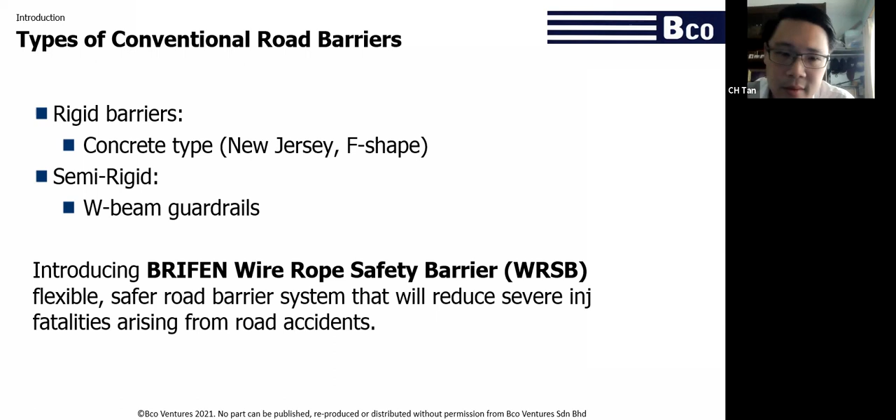A little bit of background to the BRIFEN system: it was originally developed in the UK by British Ropes many years ago. It was introduced to Malaysia in the 90s, and since then BCO has taken over the development of BRIFEN for the Malaysian market. BCO also owns the trademark and industrial design for the system in Malaysia, and BRIFEN is now a 100% made in Malaysia product.

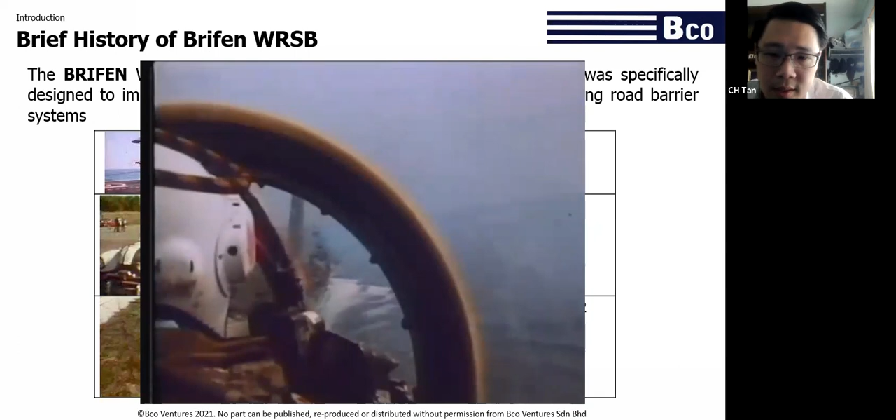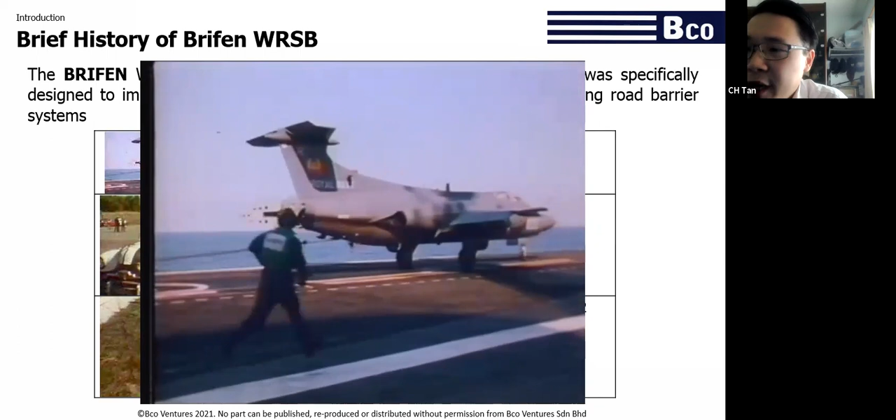So this is a short video of a fighter jet landing on the aircraft carrier. Now, this was originally the inspiration for the BRIFEN wire rope safety barrier system. As the plane lands, it is restrained by a wire rope going across the deck. So that was the inspiration. The idea being that if a wire rope can restrain a landing fighter jet, it can also restrain vehicles on the road.

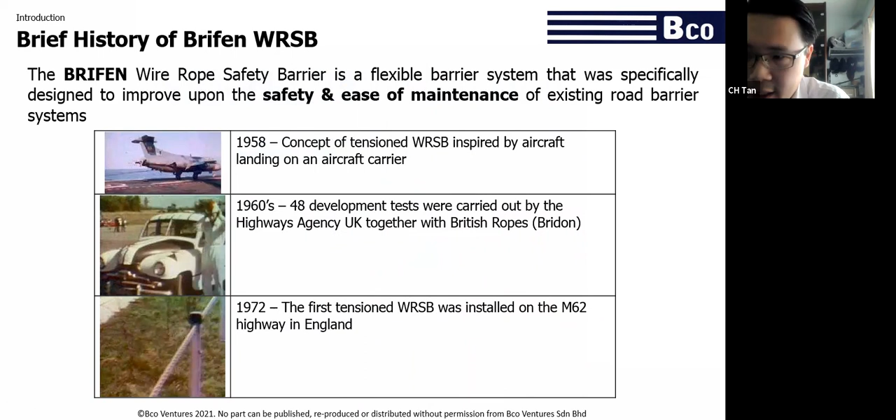So this is just a brief history of the system. The system has been developed for many decades. It started in the 60s in the UK, and the first version of the system was installed in the UK in 1972. Throughout the years, there have been a lot of testing done to comply to various standards over in Europe, in America, in Australia, to verify that the system is effective.

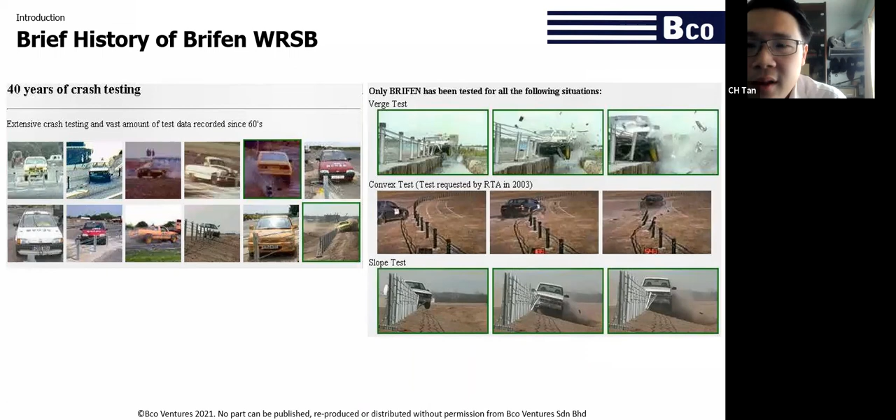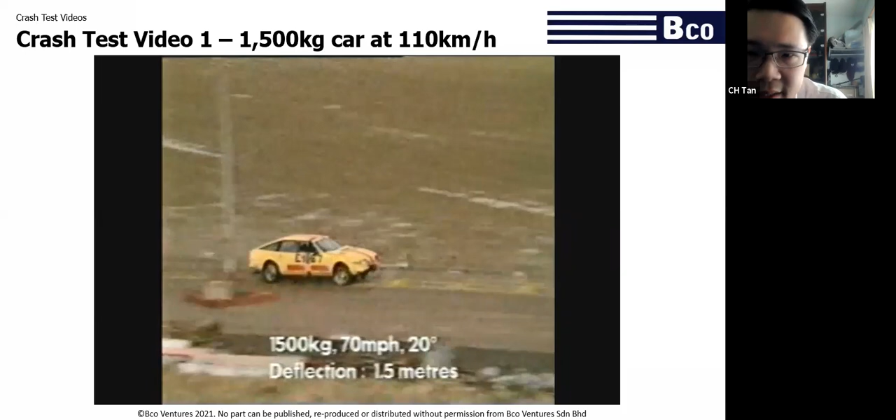So these are some of the videos of the testing that have been done on the BRIFEN system. This is a 1.5-ton car at 70 miles an hour, or 110 kilometers an hour. As you can see, when the vehicle hits the barrier, it is redirected onto the road. It does not cross over.

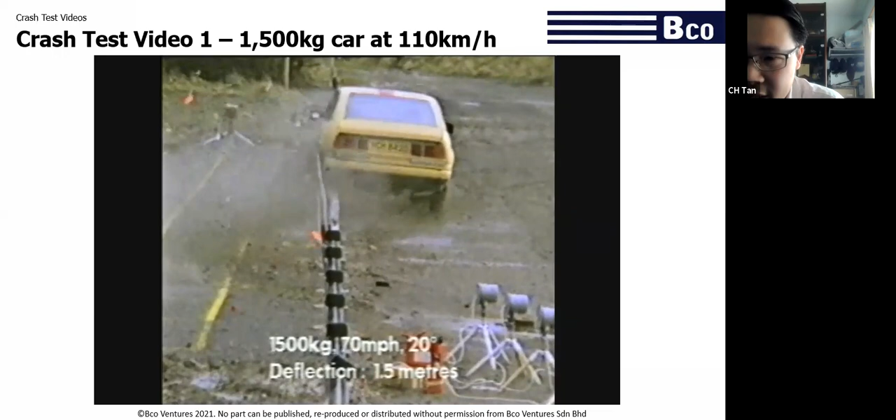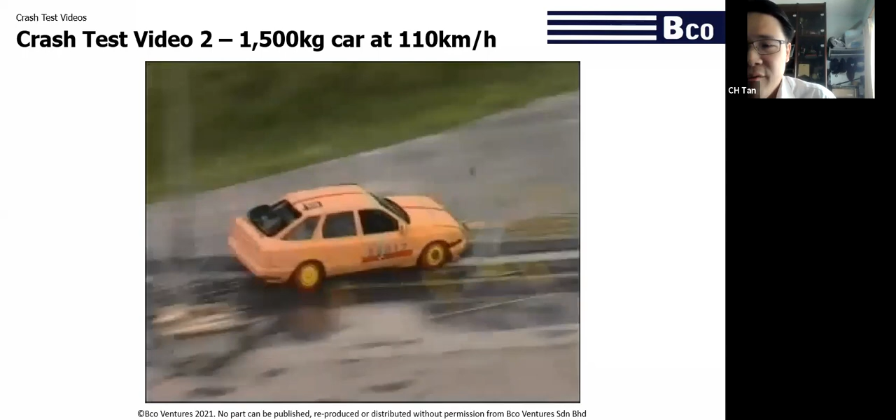This is another video, same weight of car, 110 kilometers an hour, a slightly longer video. Basically, as a flexible system, the system will deflect and absorb the energy of the vehicle. This reduces the damage to the vehicle and also the injuries to the occupants.

If the barrier is more rigid, the energy will be absorbed by the vehicle rather than the barrier, and the vehicle will have more damage and potentially more injuries to the occupants. So the purpose of the barrier, apart from absorbing the energy, is to safely redirect the vehicle on the road. We do not want the vehicle to cross over, because on the other side of the barrier there could be opposing lanes of traffic, which may cause a head-on accident, which would be very bad. Or there could also be structures behind, like a bridge or a signboard, that might cause further damage or injury to the vehicle and the occupants.

So this is a test at 110 kilometers an hour of the small car, 900 kilogram car. Again, the system deflects, absorbing the energy. Now, the idea of testing a small car and a large car is to ensure that any barrier you use covers the majority of the vehicles on the road in a particular country. So this goes from the small car up to the reasonably large car, which would cover most of the vehicles we have on the road in Malaysia.

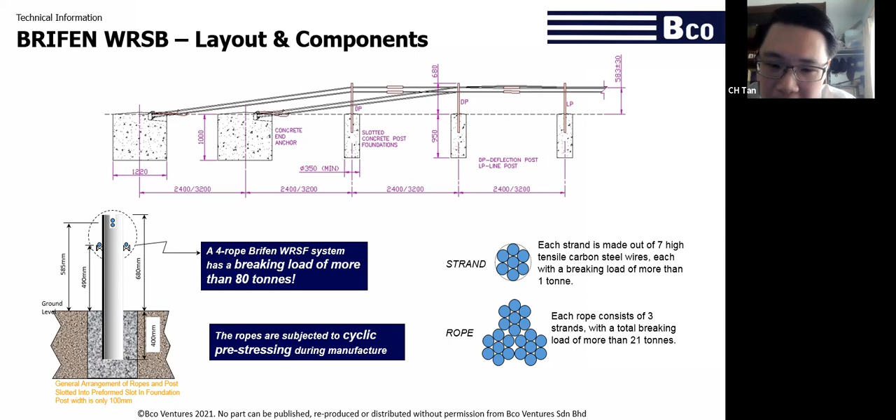And this breaking load is a direct tensile test where you clamp the rope in the machine and pull. So in the event of an accident where a car is dragging along the wire rope, the direct tensile load on the wire rope would be less. So actually to date, from our experience, we have never actually encountered the rope actually breaking due to an accident.

This is the shape of the BRIFEN post. It's referred to as an S or a Z section. They are just mirror images. If you look at it from the side, it roughly looks like an S or a Z.

Why the shape is like this rather than using a round shape is because when it is shaped like this, the vehicle will impact it in this way, and they will all fall in one fixed direction. If it were a round post, some posts might be poking out onto the road, and they may endanger other motorists or motorcyclists that come by after the accident. The idea of the mirror image is to ensure that the round edge is presented to a vehicle, so when the vehicle hits it, it does not get stuck or snagged on a sharp edge.

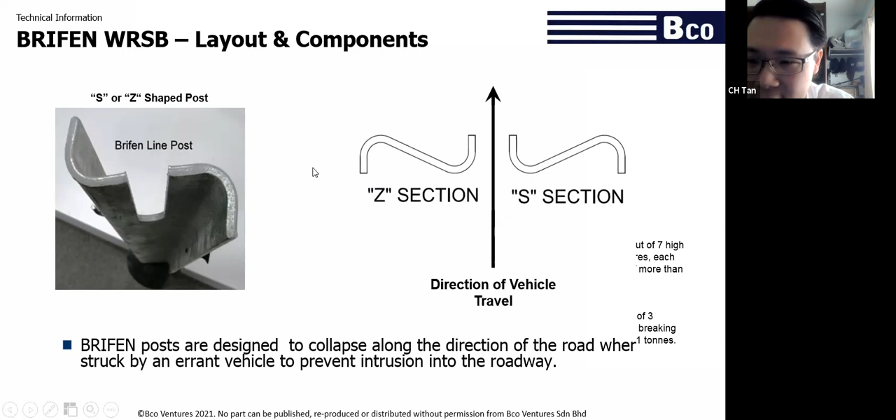This is the wire ropes. We have wire rope joints along the fence to provide tension and also to enable it to be opened up if necessary for whatever reason. We have a left-hand thread and a right-hand thread, which is used to tighten or loosen the wire ropes.

For longer fences, we will have an intermediate anchor. The purpose of this is to ensure that the barrier continues throughout the length, however long it needs to, rather than needing to stop and start the barrier again, creating a gap. By using the intermediate anchor, the system will be continuous. It's only used in barriers longer than 1.2 kilometers for one single fence.

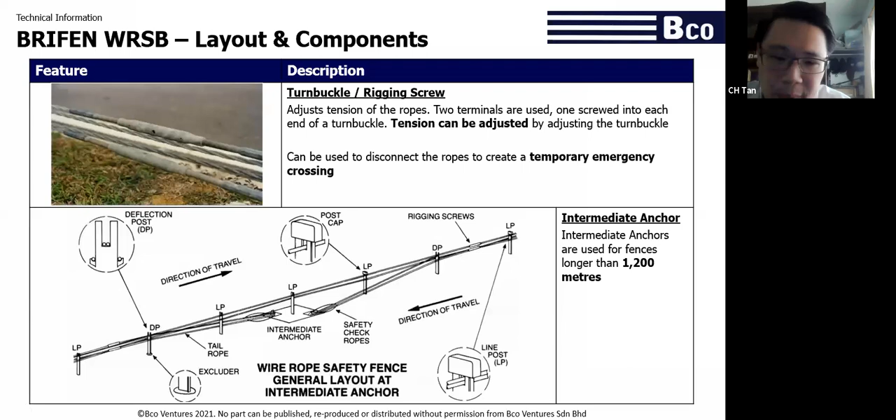The anchors, this is the ground anchor, as I mentioned earlier. There will be a concrete block underneath here, 1.2 cubic meters. In this case, the client has covered it with grass.

Another option we have is a vertical anchor. This is only used in very limited conditions, usually at places like toll plazas where the barrier needs to butt up against the toll plaza building itself or the guardrail at the end of it.

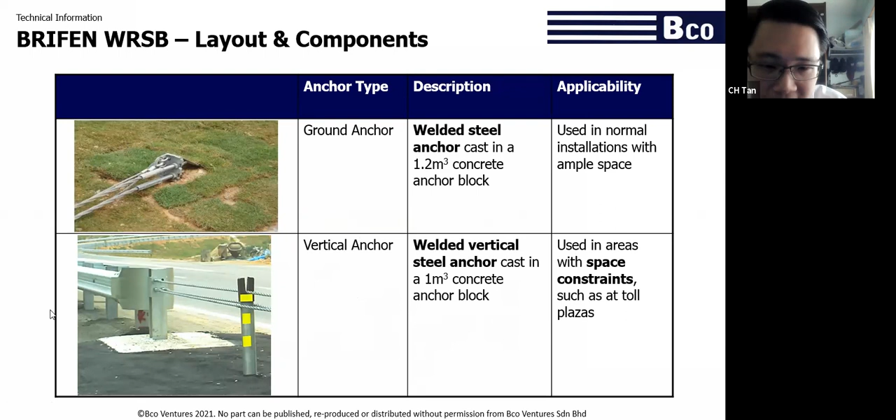Accident repair. Now, one very important concern with regards to road barriers is the maintenance and repair. We refer to it as repair because in terms of maintenance, there isn't actually any maintenance required, as in you do not have to go in and do any servicing to the system. If there's no accident, you can leave it there, it's fine. At most, maybe once every one or two years, just do a tension check for the wire rope, and that's all.

So in an accident, like we saw during the crash test video, usually around 4 to 10 posts will be damaged, but all other components are usually undamaged, which means that the wire ropes can be reused.

One of our oldest installations is actually around KLIA. This was installed when the airport was built in the 90s. The wire ropes there are still the same wire ropes from day one until now. We have just been replacing posts when necessary, when there have been accidents.

So as the posts are slotted in, they are easily removed and replaced. This saves time, and there's no heavy machinery required to pull the post out or to break the concrete or anything like that. Also, since it does not need machinery, it requires low manpower, reducing repair costs.

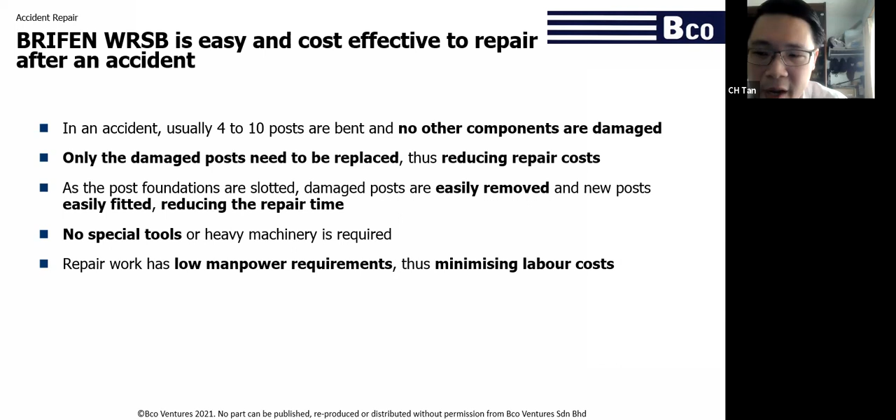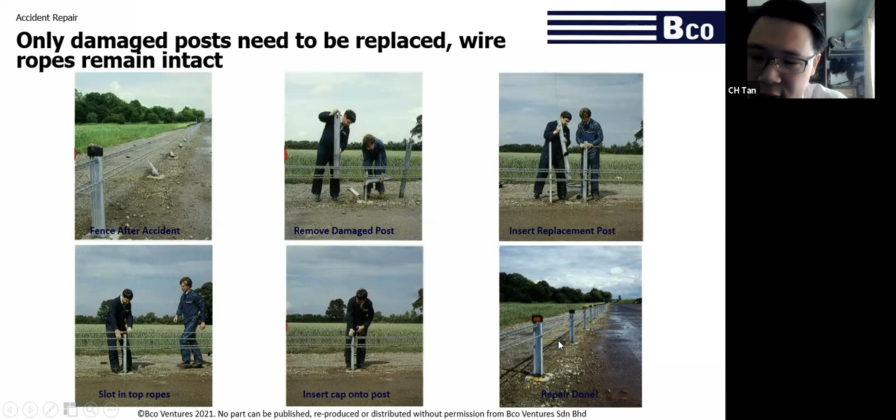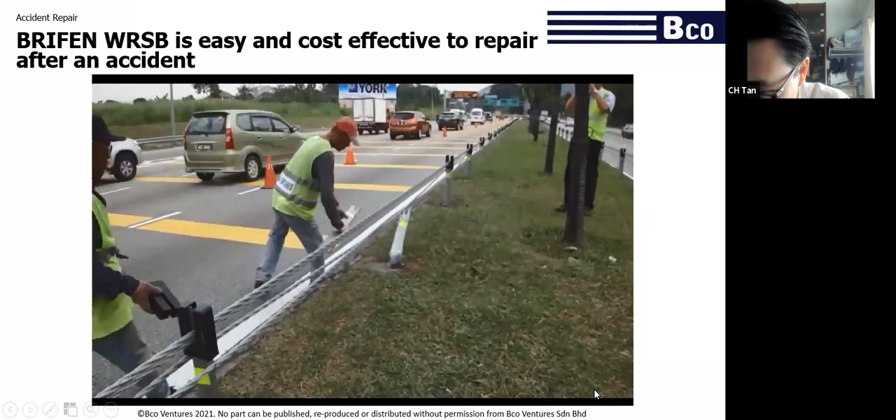This is a demonstration we did for JKR. It's from 2010, a long time ago, but the system repair process is still the same.

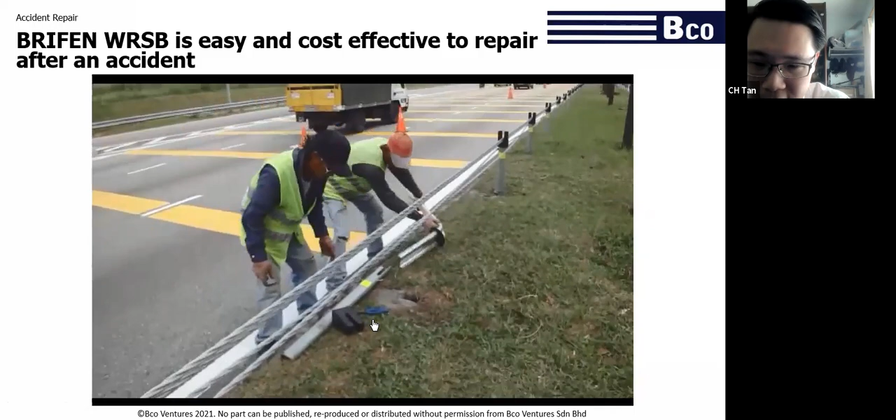You can see the post being pulled out. This is a concrete footing with a slot. He's now putting in the dust cover. The rope is parted.

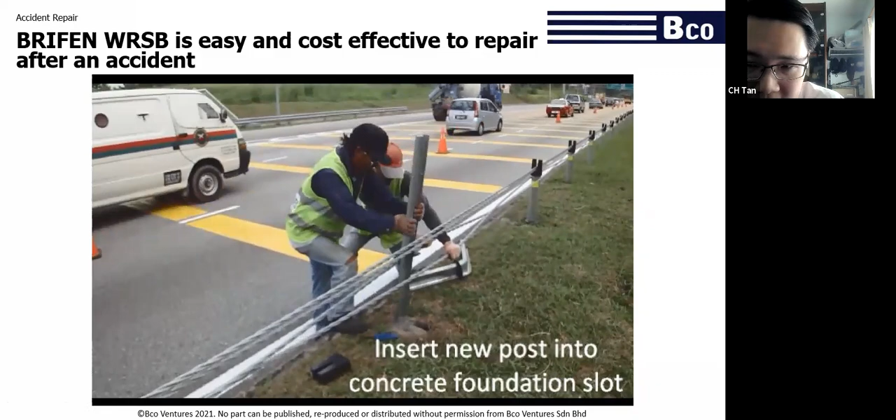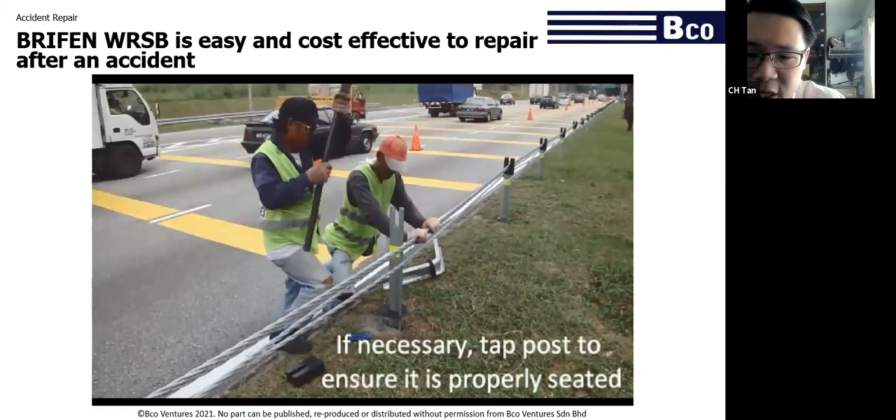The post is put into the slot. Now he's just tapping it to ensure that the post reaches the bottom of the slot, so we know that the level is correct.

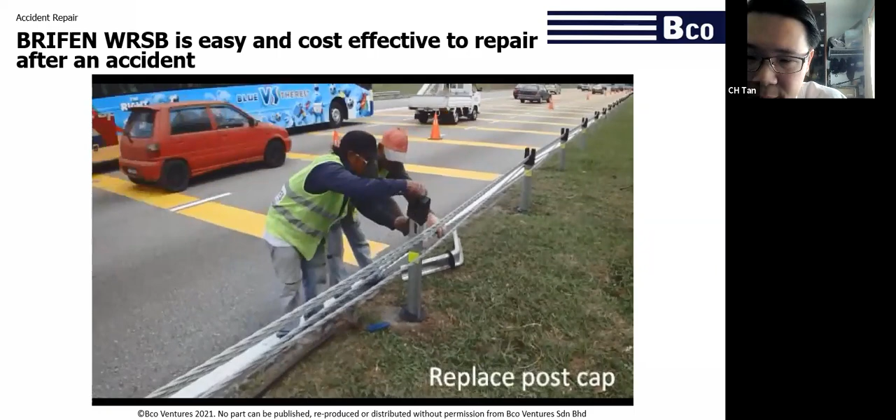Putting on the cap. Repositioning the ropes.

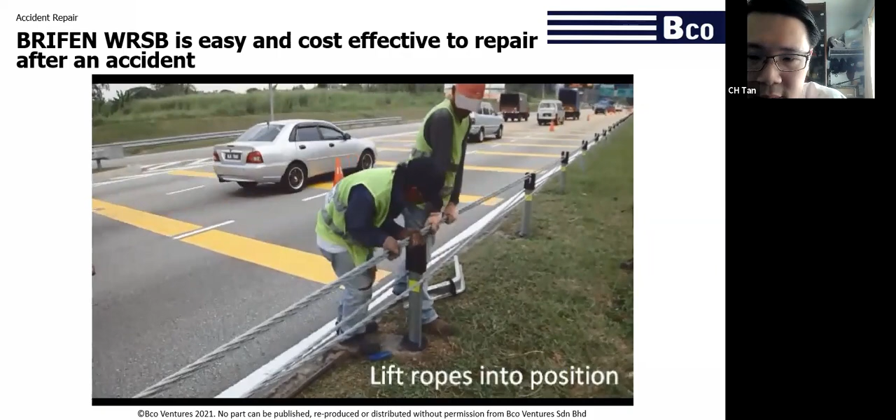And that's completed. So this took around a minute and a half. So if there were 10 posts, it would take about 10-15 minutes to actually do the repair.

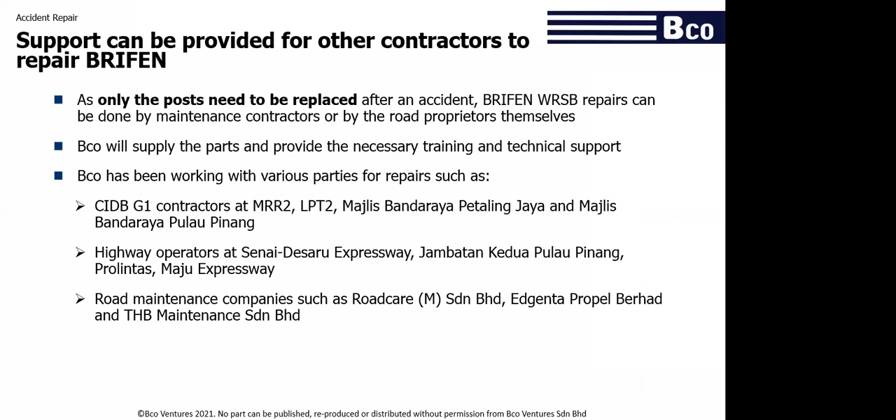Tan, sorry to interrupt. Do you have a headphone set you can use? There are still complaints about the audio being soft. I don't have one, I'll speak louder. Okay, sorry about that. If you don't have it, just proceed. Alright, I'll speak louder and closer to the laptop.

Sorry, the repair takes about 1.5 minutes per post, so if there were 10 posts damaged, it takes about 10-15 minutes from experience. Sometimes it actually takes us longer to set up the traffic management cones and signboard than to actually do the repair.

Now, as this repair is not very complicated, some of the repairs have been done by either the road proprietors, such as the concession companies themselves, or by their own maintenance contractors. BCO supplies the parts and will provide any training needed or technical support. If they have a problem, they can call us and we can advise them accordingly. So we have worked with various parties like the G1 contractors for MRR2, East Coast Expressway, and various town councils, as well as highway operators themselves, and road maintenance companies such as Roadcare, Edgenta Propel, and THB Maintenance.

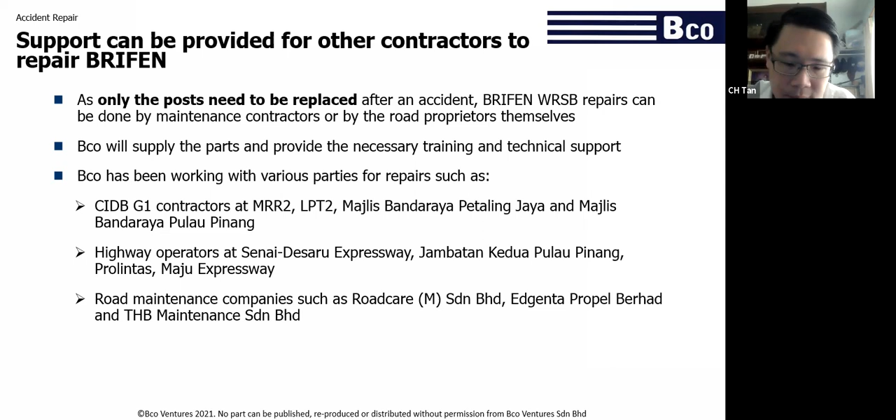This is a life cycle cost comparison. Basically, apart from being safer, BRIFEN is also a more cost-effective system than other barriers that are being used. So this calculation assumes a 1 kilometer installation. So we can look at the approximate installation cost.

So guardrail installation would be about 160 ringgit per meter, so it will cost 160,000. BRIFEN will be slightly less, around 140 ringgit per meter, so 140,000. But a concrete barrier has quite high upfront cost, usually around 350 ringgit per meter upwards.

So in an accident, if 8 meters of guardrail is damaged, it will cost approximately 3,000 ringgit to repair. This price was actually given to us by a guardrail repair contractor. For BRIFEN, if 5 posts are damaged, 16 meters of barrier, it's about 240 ringgit per post, about 1,200. So with the assumption of 5 accidents per year over 10 years, the cost would be 312,000 for guardrails and 200,000 for the wire rope.

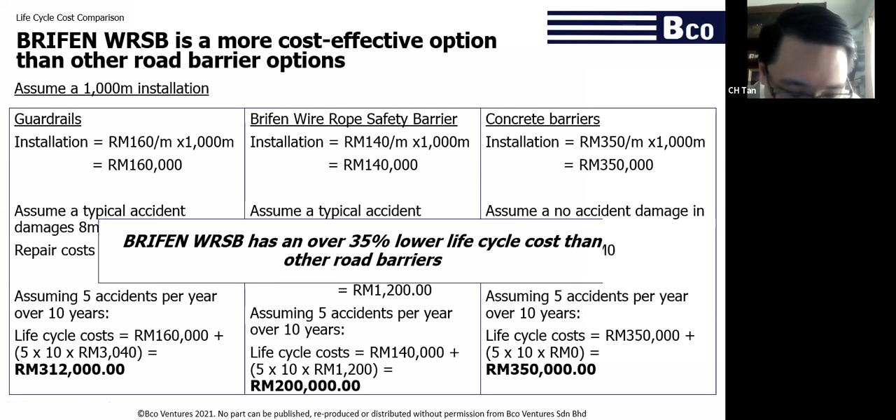Now, concrete barrier is generally accepted to have no repair cost because when hit by normal vehicles, it is usually not damaged. So it's just the upfront cost, but as you can see, it is still quite significantly higher than the wire rope system. So the salient point here is that BRIFEN has over 30-35% lower life cycle cost than other road barriers.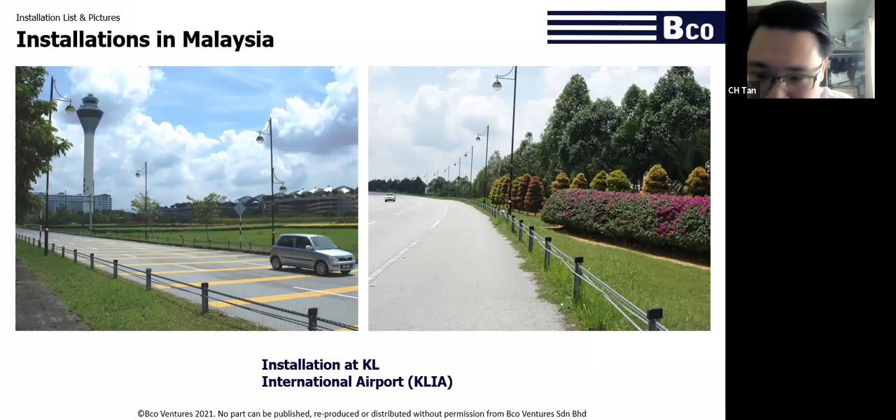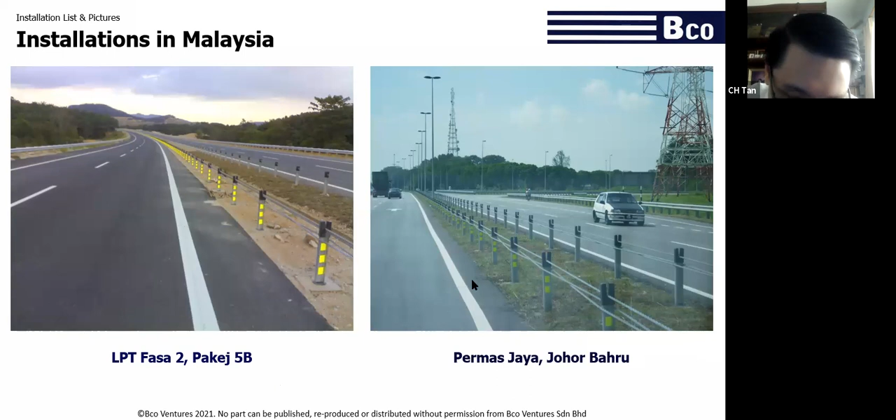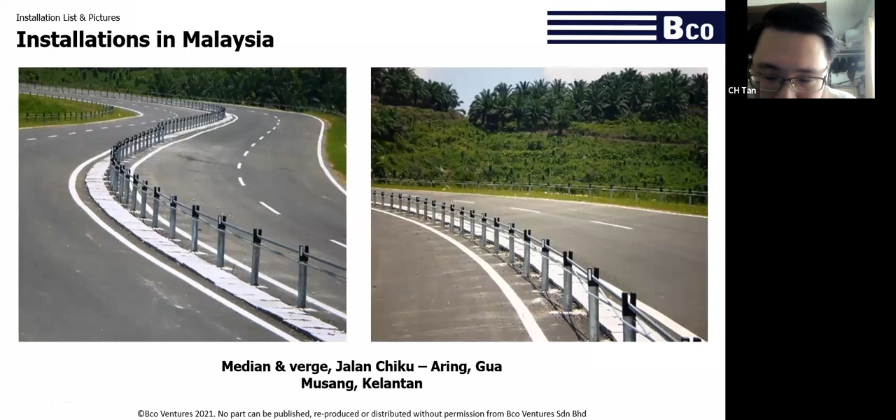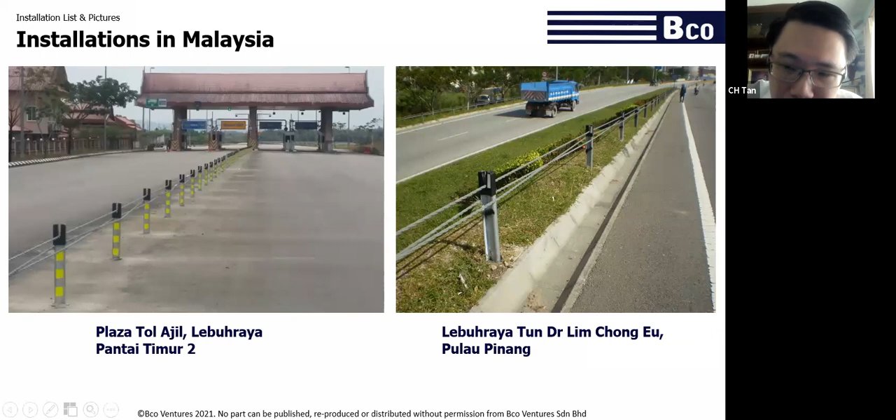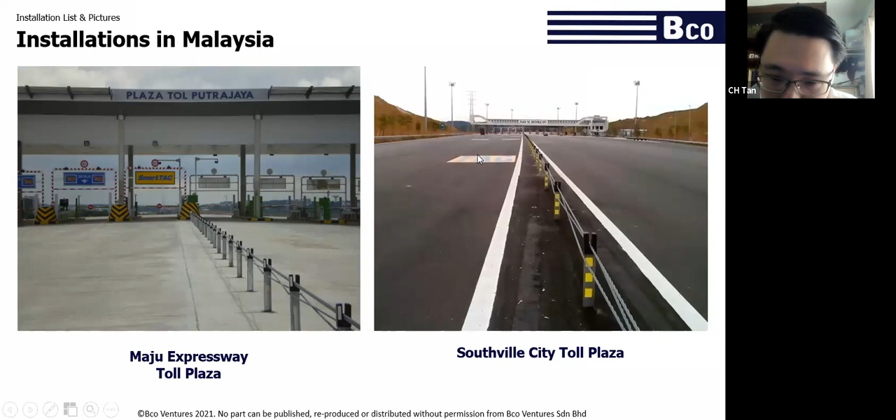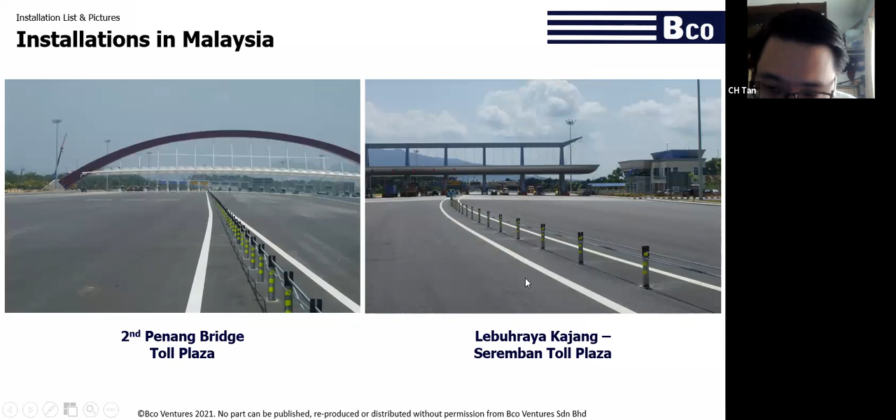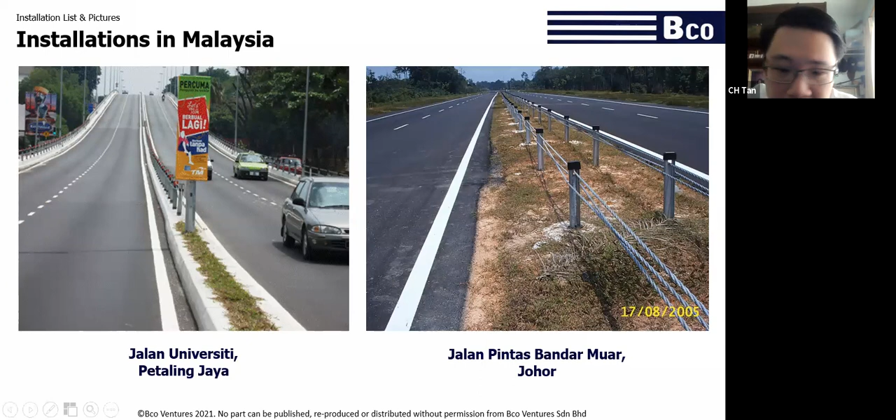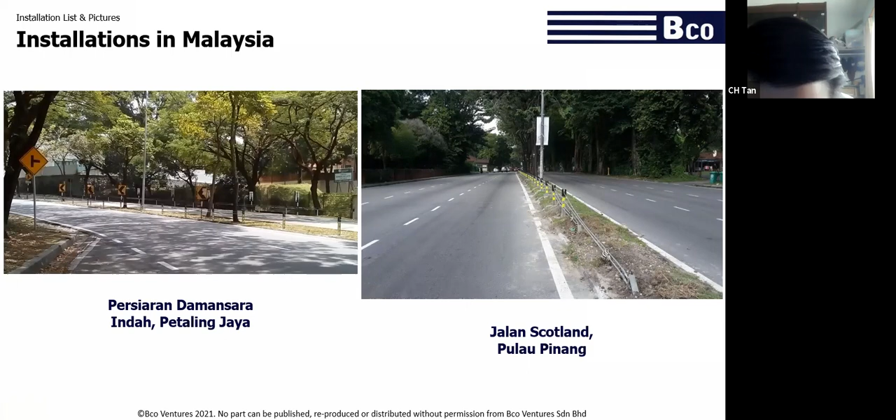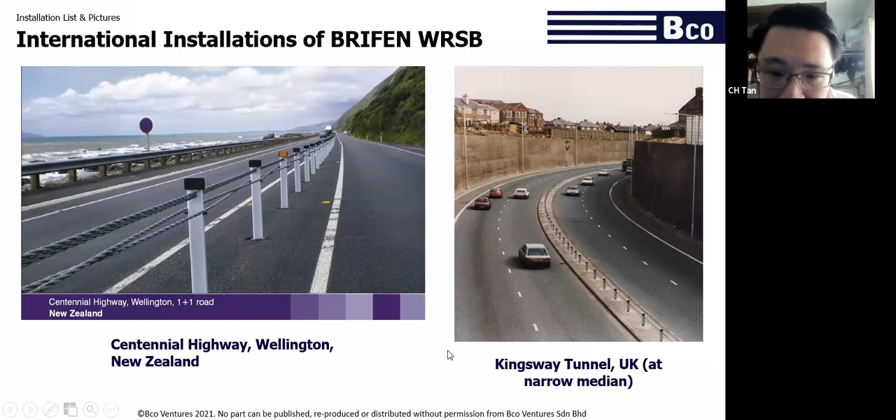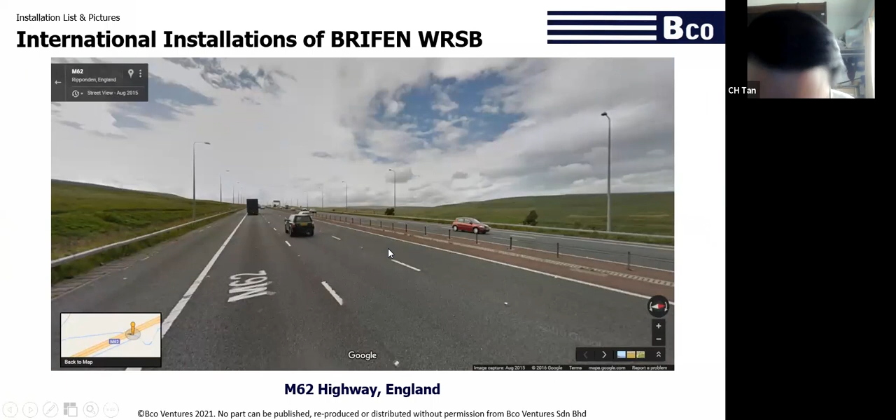This is along the M62 in the UK, where it's installed along the median. This is also in the UK, where the BRIFEN is used in the median. This is an application where the verge test is relevant, where the BRIFEN system is installed along a causeway or next to a ravine.

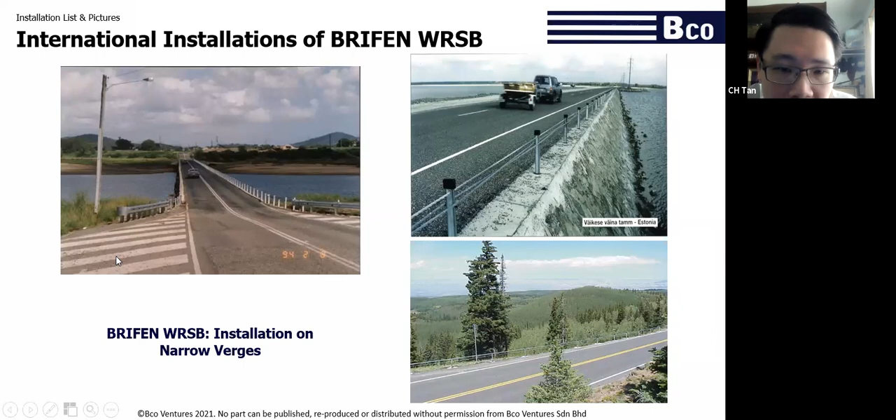These are other various installations around the world. In the UK, BRIFEN has also been used along mountain roads. This again is where the verge test is relevant.

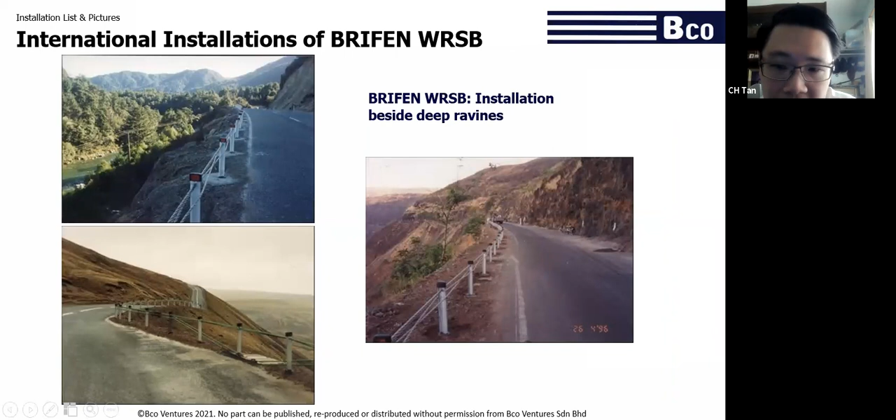Okay, that's all. I'm sorry, I think some of my presentation might not have been clear. Is there any section that anyone would want me to repeat? And they would like to see the crash test again. Okay, sure.

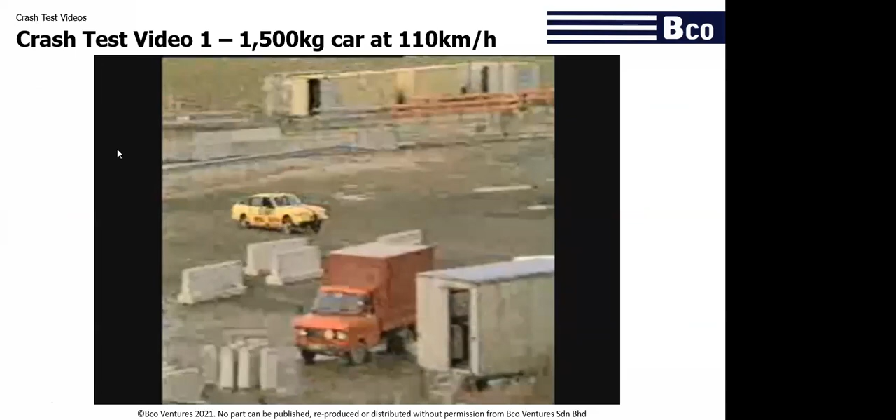Okay, this is the 1.5 ton car at 110 kilometers an hour, at about 20 degrees I believe. So a bit more information on the crash testing.

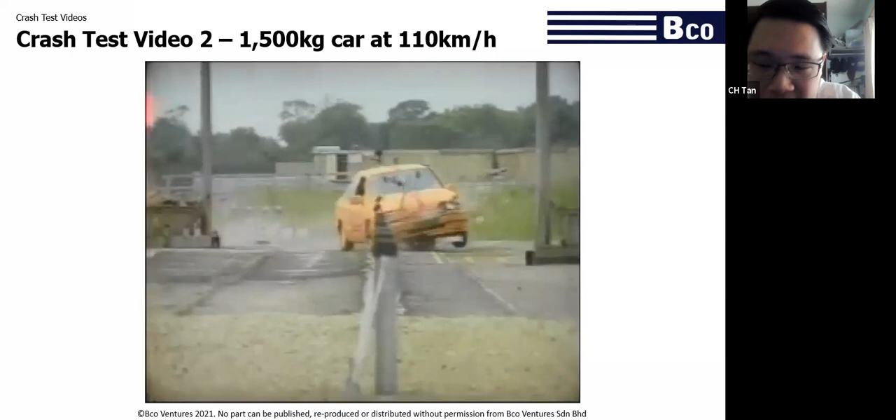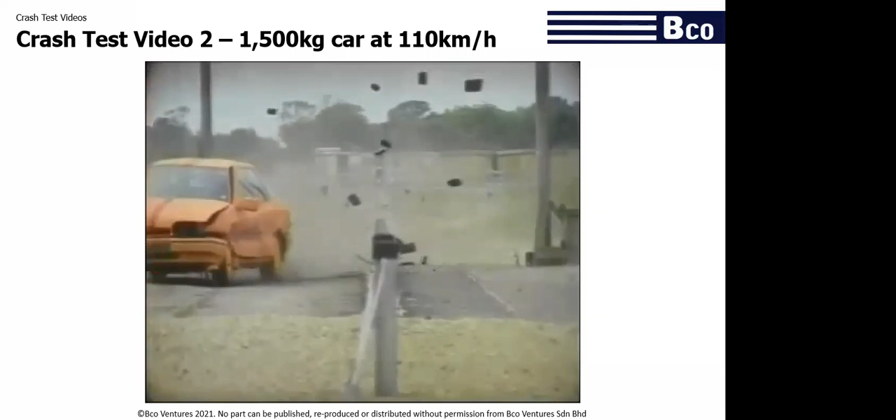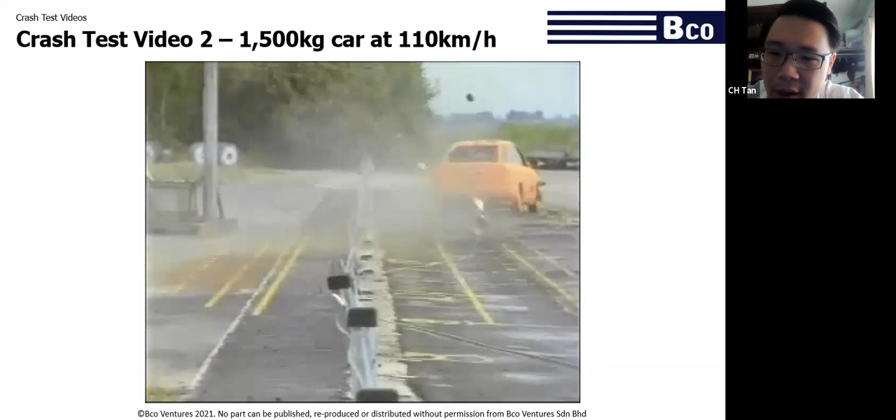Apart from just being the vehicle like this, the car is also equipped with a lot of sensors and a crash test dummy inside. The purpose of this is to measure the loads that a person would experience if they were inside the car, and it has to be within the limits of the standards. The standards will dictate what will be the maximum loads on the head, on the chest, etc., on an occupant in the vehicle.

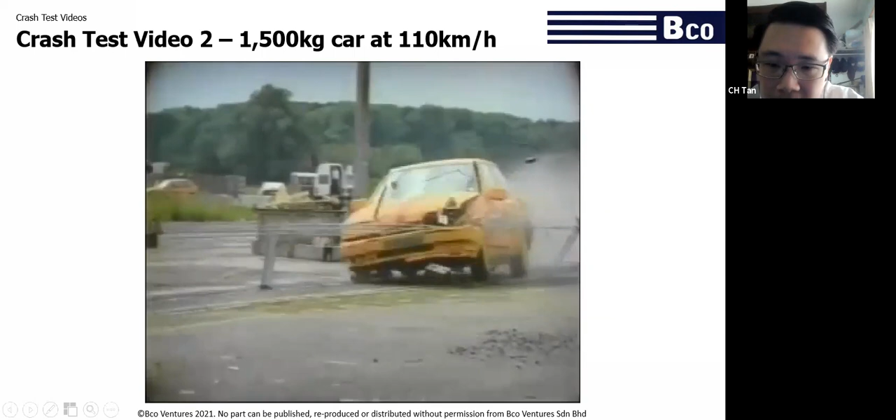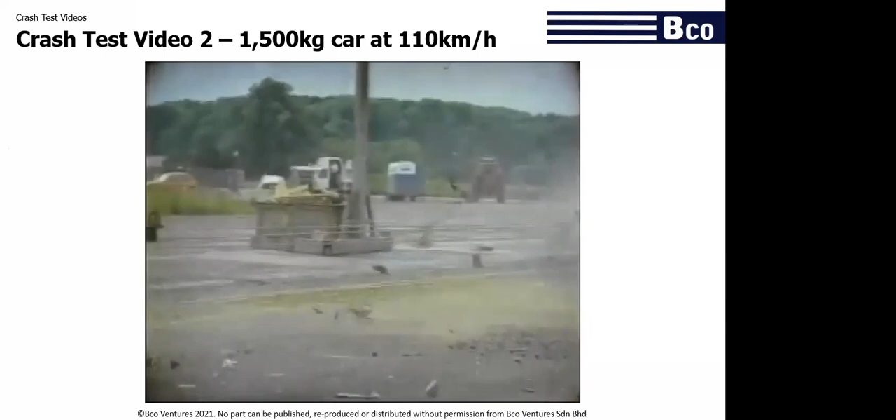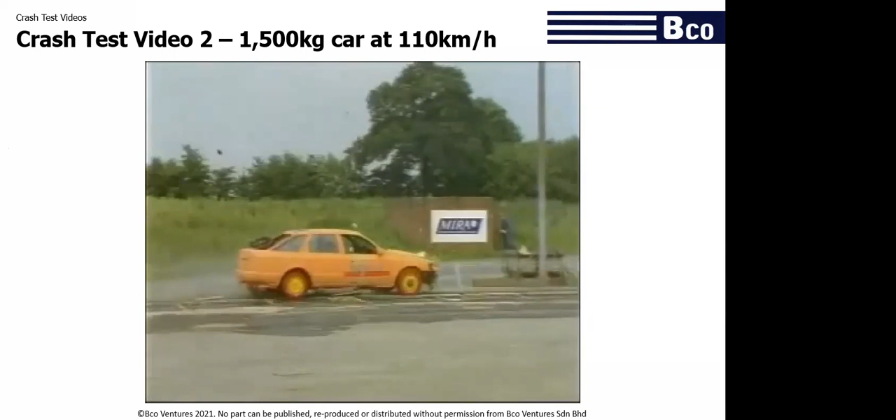Question regarding the height of the pole: is there a standard height for the pole, or can you customize it higher? Because it looks like it's about 1 meter, but maybe for a bigger truck, where the center of gravity is higher, when it hits the impact or the rope, it might just flip over to the other side.

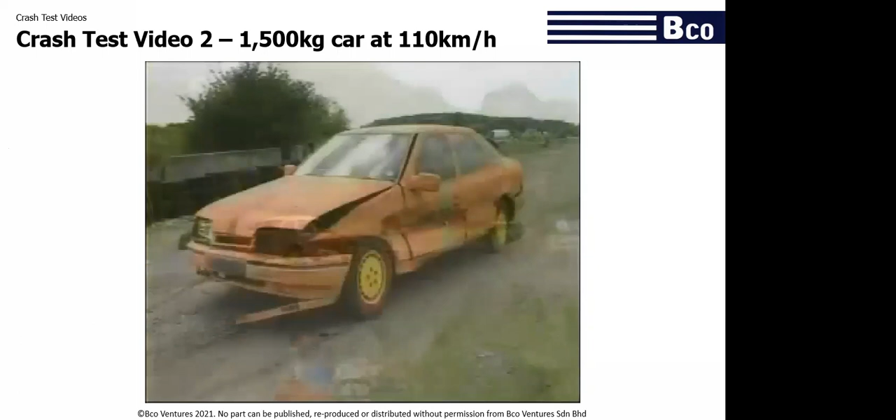Oh yes, okay. The height of the rope itself is actually about 585 mm. The adjustment we have is about plus minus 30 mm only. Now why it is that low is because this system is mainly designed for cars, so that's why it is designed at that level, because there's a level to catch cars. For heavy barriers, for heavy vehicles it would tend to be a bit higher, but that would be not so good for cars. That's why we have different standards - test level 3, test level 4, or the N2, N3, N4 level, etc. But what we have seen in actual experience is that the wire ropes are still able to catch the wheel level of lorries and all that.

Because the system is flexible, the barrier will move away from the vehicle, so it helps to redirect the vehicle. It's quite difficult for the vehicle to topple over the barrier because of the flexibility. It's kind of like if I were walking and I were to kick something that moves away from my leg, I probably won't fall over. But if I kick a step which is rigid and doesn't move, that is when there's a higher potential for you to fall over the item.

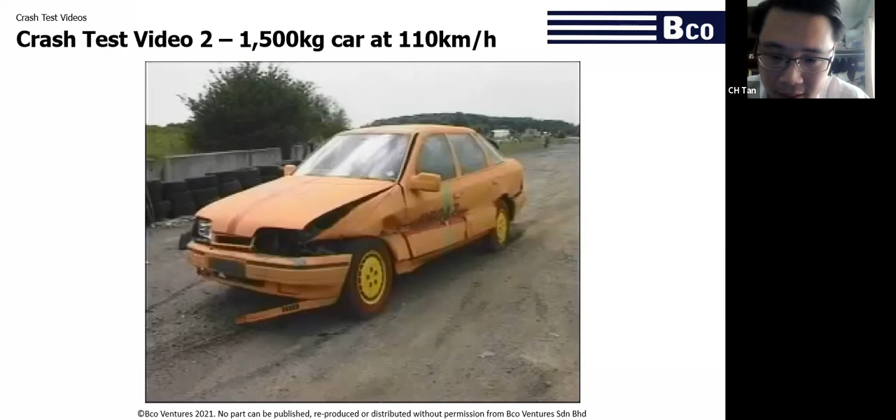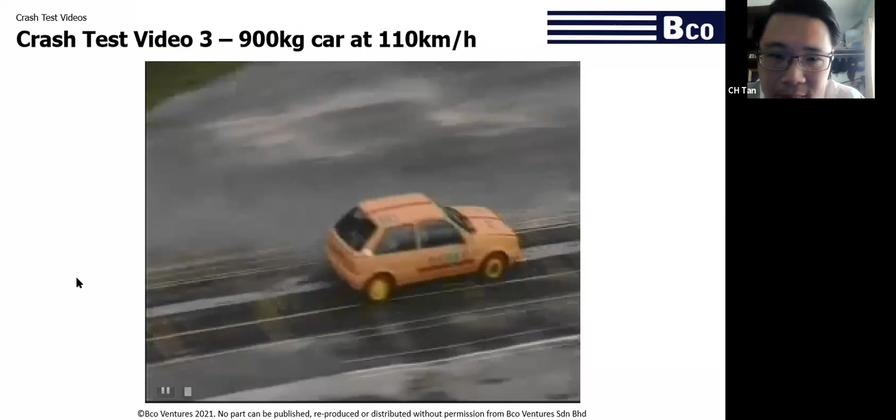There are some questions here, Tan. Yep, okay. Kelvin is asking if there's a test for larger vehicles. Yes, there are tests for larger vehicles, but generally the design would be different for the systems. Let me move to the...

The higher test level barriers would end up having to be more rigid, taller, bigger, stronger to stop the heavy vehicles. So they would be less effective, less forgiving for smaller cars, smaller vehicles.

Okay, any more questions?

Just to get a check, the Arahan Teknik - the last I spoke to JKR, it was in printing. But the problem is that the only way for us to obtain a copy is to buy it from the office in the Ministry of Works, which we are not allowed to do. So we will be getting it as soon as we are allowed to do so.

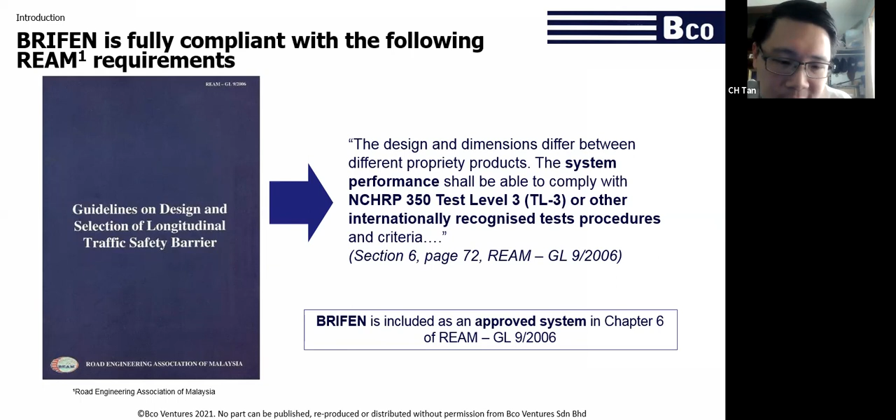Okay, so this system is actually - to all the colleagues in Unitrade and BRIFEN - targeted for infra contractors, those doing roads when they have new road projects. We have also tried doing conversion because of the cost savings, in a sense that it will attract the contractor to convert from the usual guide rail system to wire rope system, provided the criteria meet, and to save costs for the contractors.

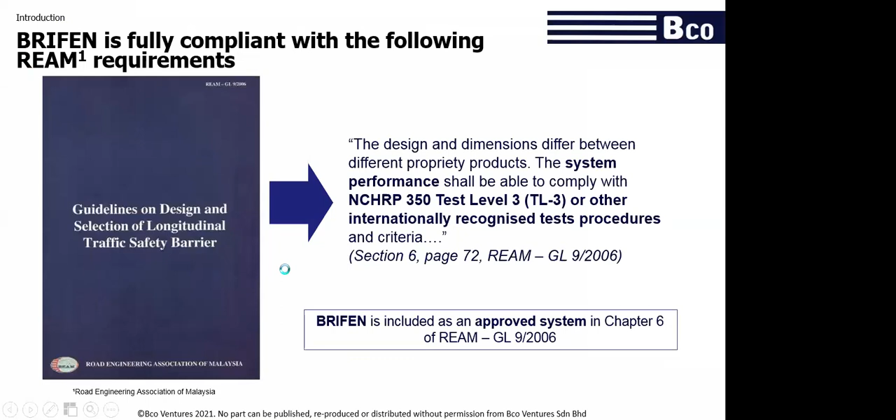And this is actually one of our selling points that we have done. This is where if you have customers who are actually in the road infra works, this is something you can recommend. BCO is also a contractor doing the installation as well, so we can work with them on the existing roads and drawings that they have, so that we can configure what system we can put in with BRIFEN.

Okay, let me see. Ryan, you have a question here: after accidents where replacement of poles are required, wouldn't the wire rope have lost a certain amount of strength? Okay, this is on the flexibility. Tan, would you like to explain that?

After an accident, the wire ropes generally do not lose strength and flexibility, because the wire ropes are also pre-stressed at the manufacturer's place - basically the same principle as lift cables. After manufacture, they stretch it to get rid of all the kinks, so it will not lose any strength or elongate. Similar to a lift cable - once installed, the lift goes up and down, and the cable doesn't keep extending.

In terms of replacements, it's generally more about the life of the galvanizing of the wire rope, not so much the actual loss of strength. And repeat sales would come mainly from repairs and maintenance, so supplies of posts and accessories like the plastic cap, reflector stickers, and a few other bits that go with the post.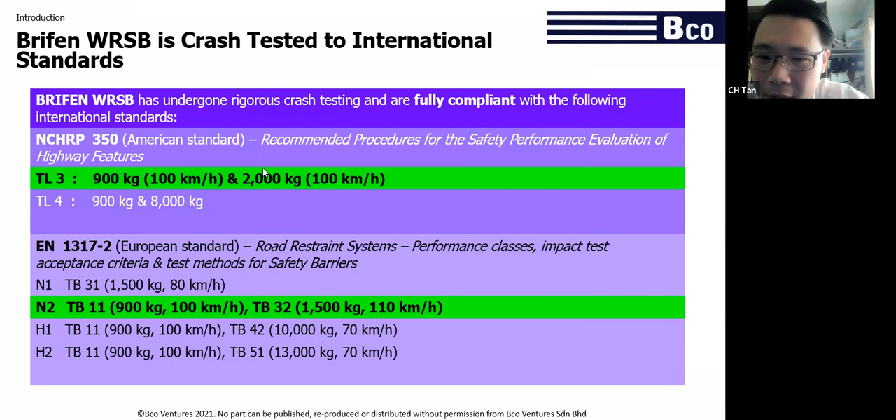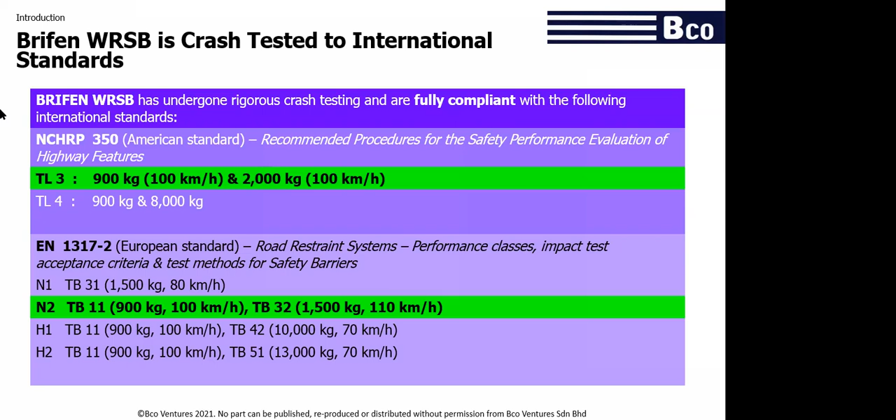Since the ATJ hasn't been updated for so long, a lot of so-called engineers at JKR have been designing roads based on what they can find in ATJ. Hence why you see a lot of guardrail systems available. But we've managed to itemize this BRIFEN wire rope system as another option to replace guardrail, so hopefully more jobs will be specified with these wire ropes. For jobs currently with guardrail, there's also an option to assist in converting to BRIFEN by talking to the related parties, but the first choice is the contractor must be willing to try and write a letter to the authority so we can follow up and assist them.

Is there any more questions? Tan, do you still have the video on MR2, the lorry? Oh, the lorry video, the one quite recent, yeah. Let me find it. Share first, I will look for it. Give me a second.

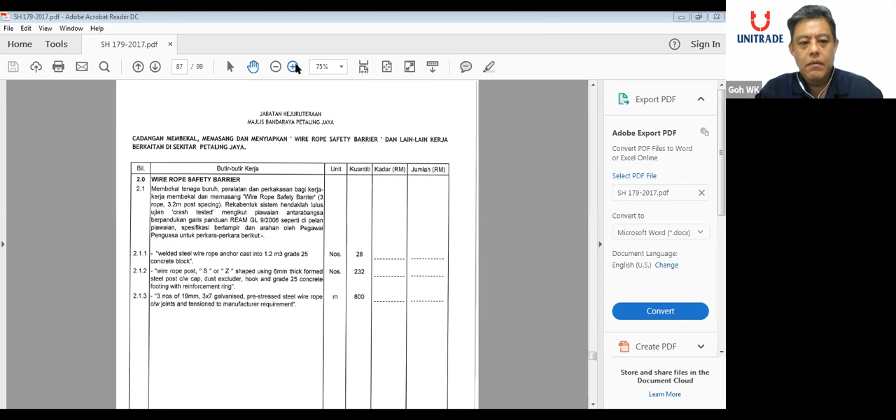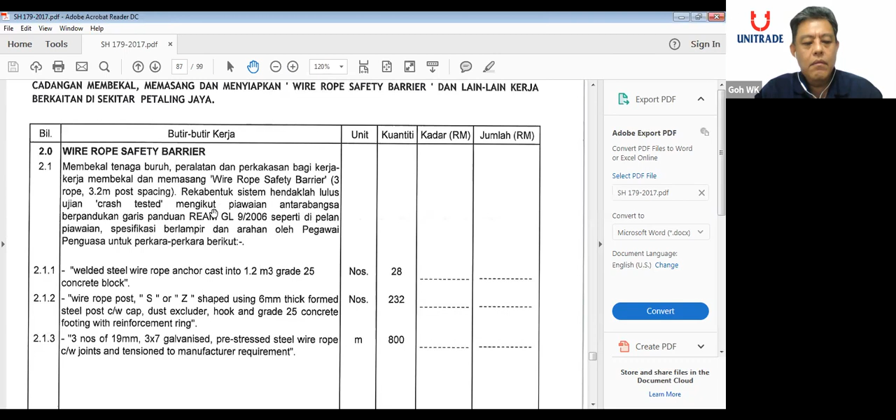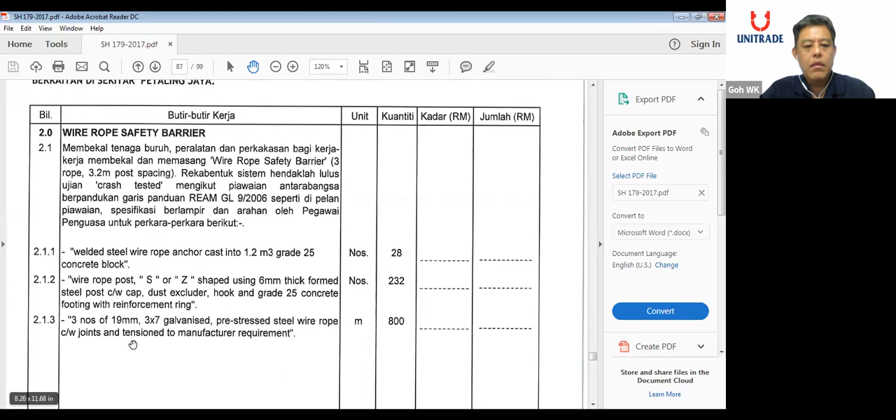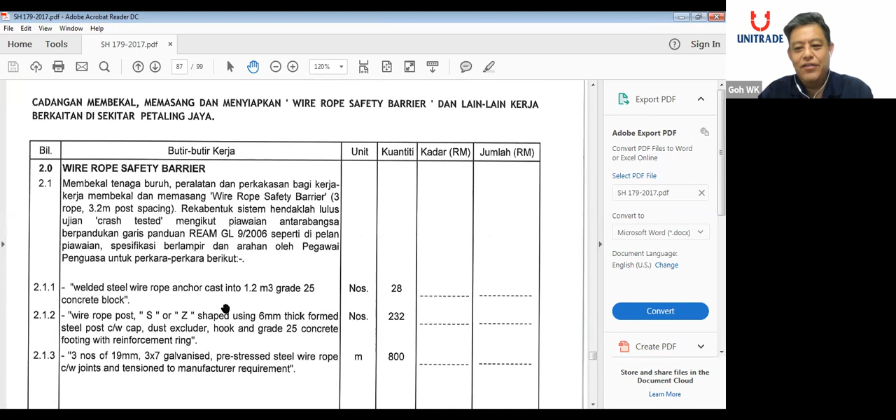So this is a sample, this was under one of the projects we did under MBPJ. You just write like this: wire rope safety barrier, 3-rope, 3.2 spacing, needs to be crash tested according to international standard or REAM guideline. This is a base for this particular project, split up into the anchors, the posts, and the ropes. So this is roughly what one of the BQs that was issued looks like. Of course the important point here is the wire rope post S and Z, that is with reference to BRIFEN. They can put that, but of course they are not allowed to put the brand names.

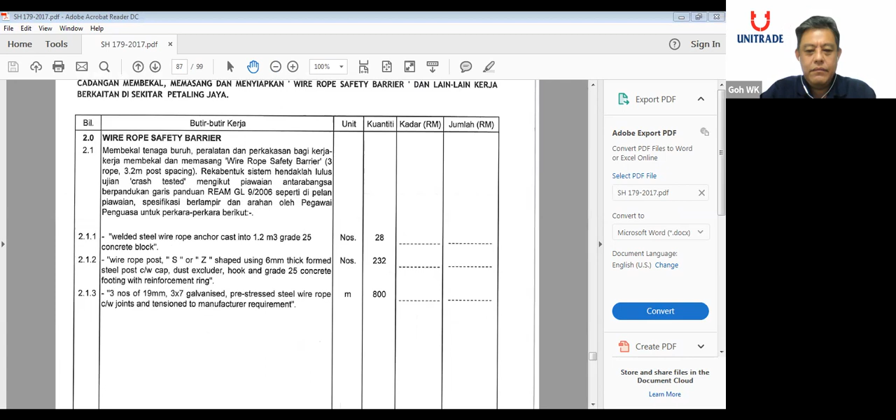Any more questions? As you can see, the average accident death on Malaysian roads is about 12.7, as I mentioned earlier. So it is our hope that more wire ropes can be placed at dangerous positions of the road to help reduce these statistics.

There's another question from Jimmy about a typical specification table. Specification table - I think that is covered in the catalog. In terms of specification we actually only have a few: 4-rope 2.4 meter spacing, 4-rope 3.2 meter spacing, and 3-rope 3.2 meter spacing. Just three types. Generally the 4-rope we use on a median if it's a single fence at a median. Most of the time we recommend the 3-rope 3.2 meter spacing for cost effectiveness. The crash test results for all three are actually about the same.

So colleagues, if you have more questions or enquiries from your road infra contractors, please contact me or Mr. Tan, and we will assist you from the specification side right up to discussion and design for your contractor. And if necessary, to meet JKR to explain the system, or explain to your consultant, we will be more than glad to help. Hopefully this will be another new product that Unitrade and REAM colleagues can help push to your contractors.